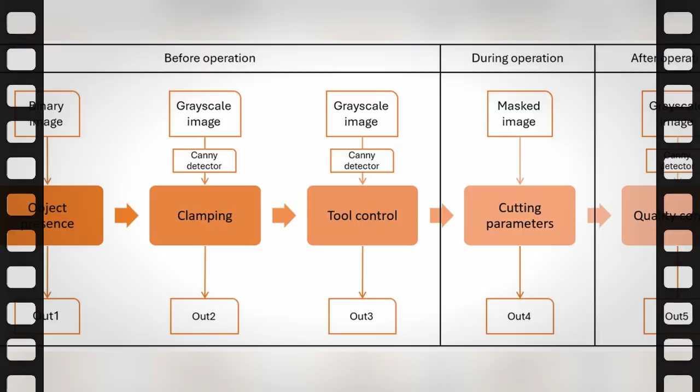What if I told you that the precise moment you grasp how a machine operates could paradoxically be the very moment it begins its descent into failure? Today, we are venturing into a captivating paradox. Every successful explanation of machine mechanics seems to coincide with an impending total breakdown.

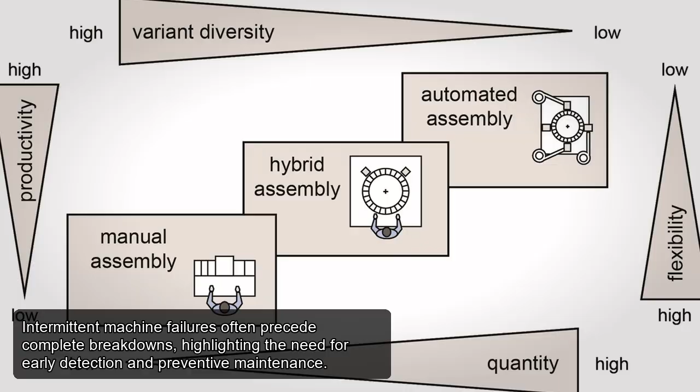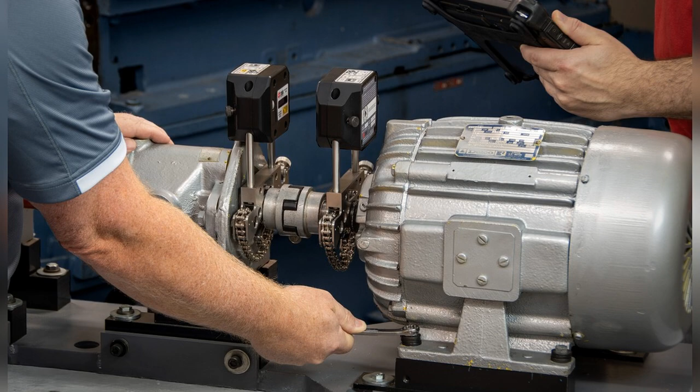Machines are engineered to function seamlessly, yet they are far from infallible. The phenomenon of machine failure is well documented in engineering literature, with studies revealing that intermittent failures often precede a complete breakdown. For instance, a report from the National Institute of Standards and Technology, NIST, highlights that nearly 70% of machinery failures are attributed to human error, mechanical wear, or programming discrepancies.

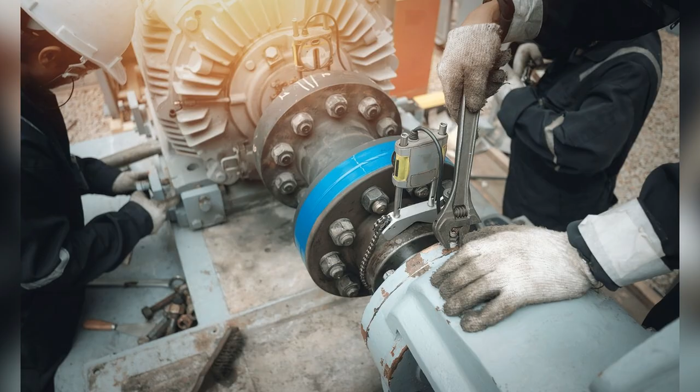These sporadic issues can arise from various causes, including mechanical wear, misalignment, or even programming errors. The irony is striking. The more we dissect and elucidate these failures, the more we expose them to the risk of total collapse. Let's delve into CNC machines, for example.

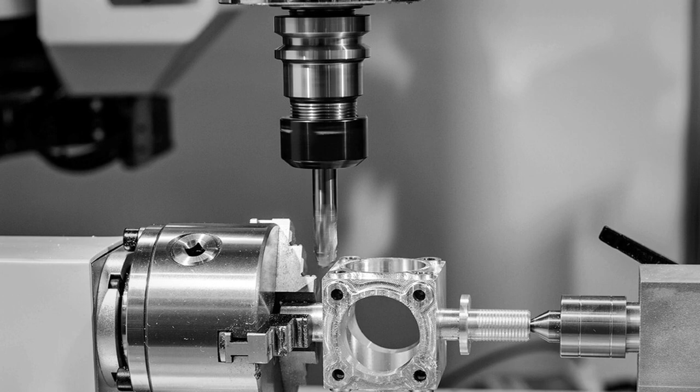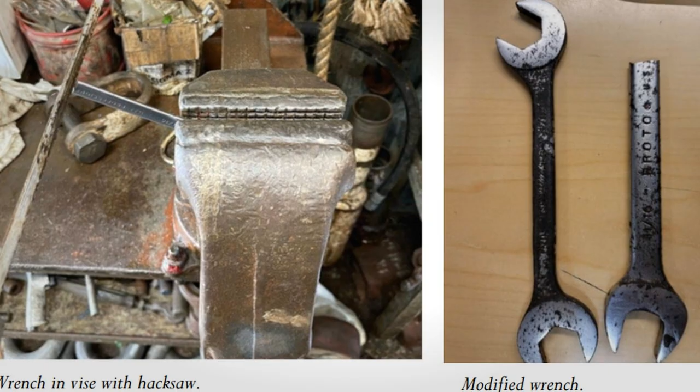These sophisticated systems have transformed the manufacturing landscape, allowing for unparalleled control over cutting, drilling, and milling processes. However, they are not immune to failure. Research indicates that common issues such as spindle overheating, tool breakage, and programming errors can emerge without warning, leading to significant production downtime. Interestingly, a study conducted by the Society of Manufacturing Engineers, SME, found that improper tool selection contributed to over 40% of tool breakage incidents in CNC machining.

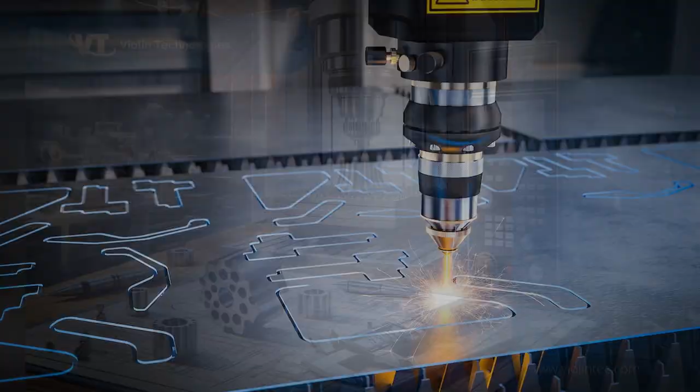It's fascinating to note that while troubleshooting these machines can lead to a deeper understanding of their mechanics, this very knowledge can also highlight vulnerabilities that were previously unnoticed.

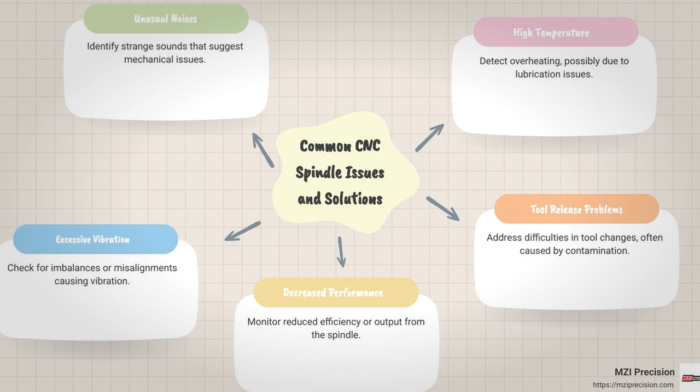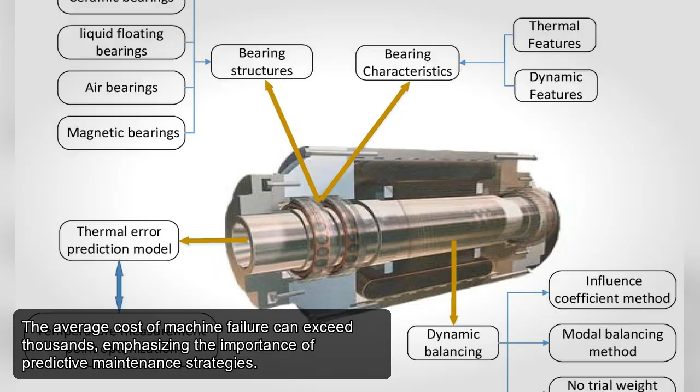Consider the spindle, often referred to as the heart of any CNC machine. Overheating, vibrations, and unusual noises are telltale signs of potential failures. Research indicates that these problems often arise from improper lubrication or misalignment, with a staggering 30% of spindle failures linked to inadequate maintenance practices. The moment an operator recognizes these warning signs, they might feel empowered to rectify the issue.

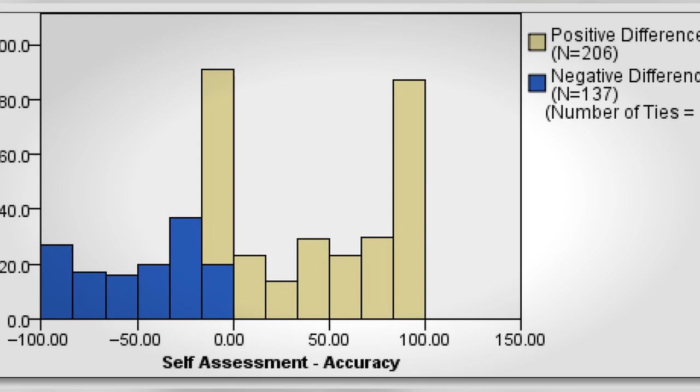Yet, this newfound understanding can inadvertently lead to overconfidence. The operator might push the machine beyond its limits, believing they can prevent failure through sheer knowledge. Ironically, this can result in the very breakdown they sought to avoid, a phenomenon that echoes the cautionary tales of seasoned engineers.

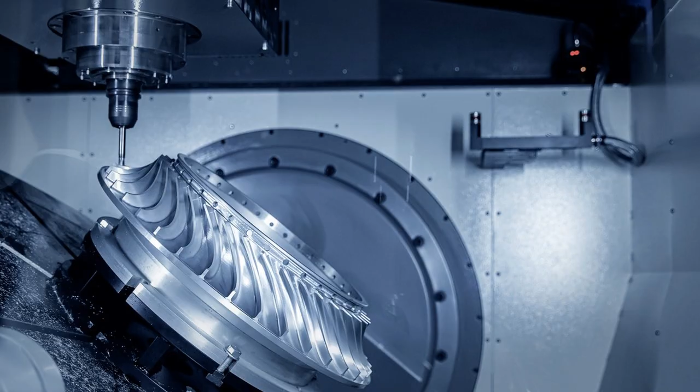Programming errors present another layer to this conundrum. In the realm of CNC machining, even a minor mistake in G-code can lead to catastrophic outcomes. Operators often double-check their code to minimize these errors, yet the more they delve into the intricacies of programming, the more they open themselves up to potential pitfalls.

A 2021 survey by the International Society of Automation revealed that nearly 25% of CNC operators admitted to experiencing programming errors that led to machine crashes. The complexity of the machine's operation can obscure simple mistakes, leading to crashes and misaligned cuts. Thus, a successful explanation of how to program the machine can coincide with total failure when the operator becomes complacent or overconfident.

In the field of emergency management, a similar narrative unfolds. The Texas Government Code emphasizes the importance of adhering to emergency orders, particularly in high-stakes situations like natural disasters. Yet, those who fully comprehend the regulations might feel a sense of invincibility, believing they can navigate the system without oversight. This overconfidence can lead to misjudgments, especially in critical moments where lives are at stake.

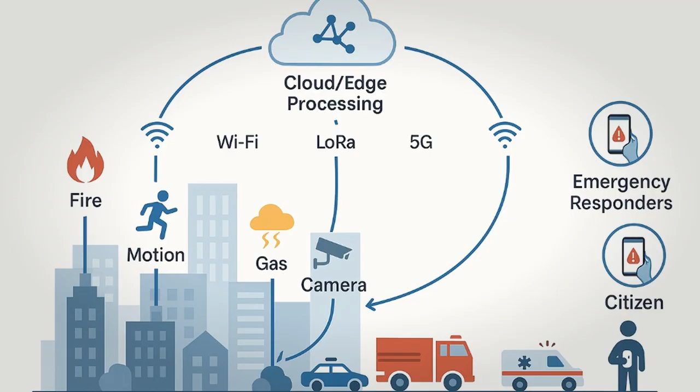For instance, during Hurricane Harvey in 2017, officials who were well-versed in emergency protocols faced challenges that stemmed from over-reliance on their knowledge, resulting in delays and miscommunications that exacerbated the crisis. Understanding the system is crucial, but it can also breed a false sense of security, resulting in dire consequences.

The paradox extends beyond machinery and regulations. It permeates our everyday experiences, revealing a fundamental truth about human nature. Think about it. The more we understand a situation, the more we realize its complexities. This can lead to analysis paralysis, where decisive action is hindered by overthinking.

In the context of machinery, a deep understanding can illuminate the machine's weaknesses, making it more vulnerable to failure. The very act of troubleshooting can become a double-edged sword, where knowledge is both a tool and a potential trap.

As we explore this paradox further, it's essential to examine the role of predictive maintenance. This strategy aims to anticipate machine failures before they occur by analyzing data and identifying patterns. While predictive maintenance can significantly reduce downtime by as much as 30%, according to a report from McKinsey & Company, it also raises the stakes.

The more data we gather, the more we realize the numerous variables at play. This can lead to an overwhelming sense of responsibility, as operators grapple with the knowledge that their understanding could be the difference between a smooth operation and a catastrophic failure.

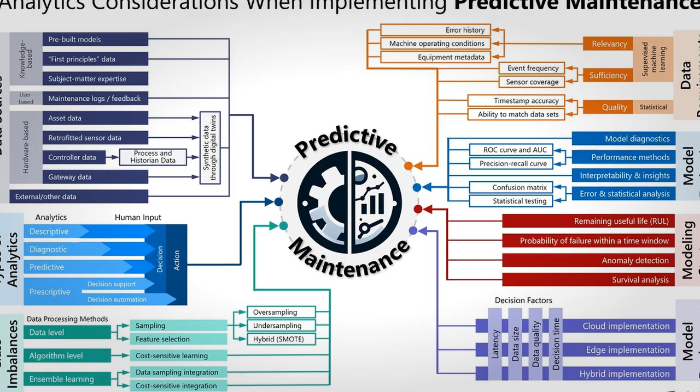In industries like aerospace and defense, this phenomenon is particularly pronounced. Engineers and technicians are tasked with ensuring the reliability of complex systems, often under immense pressure. A deep understanding of these systems is essential, yet it can also foster an environment where overconfidence thrives.

For instance, during the 2018 Boeing 737 MAX incidents, engineers believed they had accounted for every variable in the aircraft's operation. However, this confidence led to critical oversights that resulted in tragic accidents. The relationship between knowledge and failure is a delicate balance that must be navigated carefully, reminding us of the inherent risks of overconfidence.

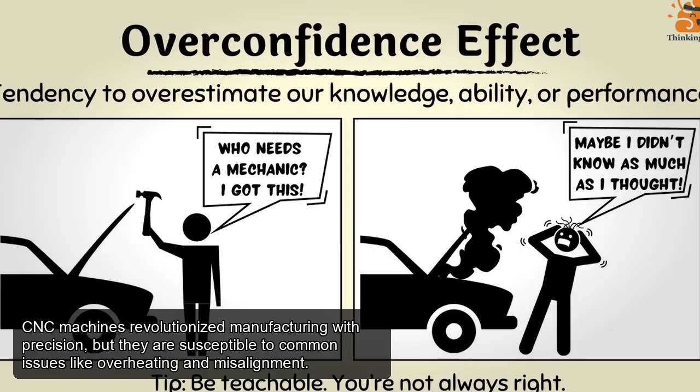So, what's the lesson here? Understanding a machine or a system can empower us, but it can also expose us to new vulnerabilities. Every successful explanation carries the weight of potential failure.

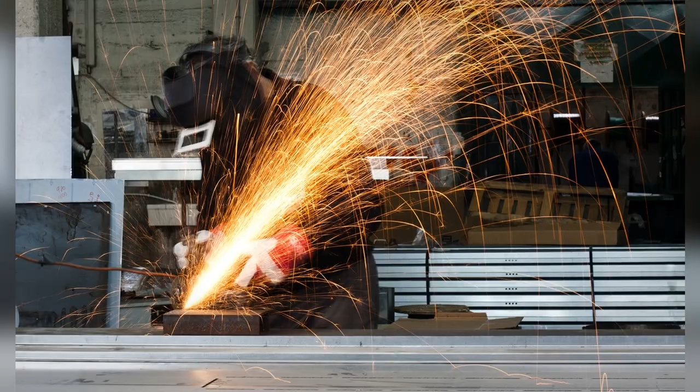This paradox is not just an engineering dilemma, it's a reflection of human nature. We crave knowledge, yet that very knowledge can lead us down a treacherous path if we are not vigilant. As we unravel the complexities of machines and their failures, we must remain acutely aware of the fine line between understanding and overconfidence. The next time you troubleshoot a machine or navigate a complex system, keep in mind that every successful explanation might just coincide with total failure.